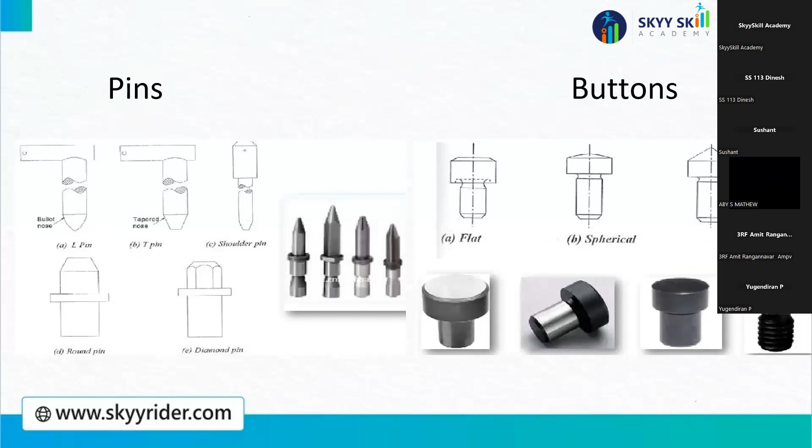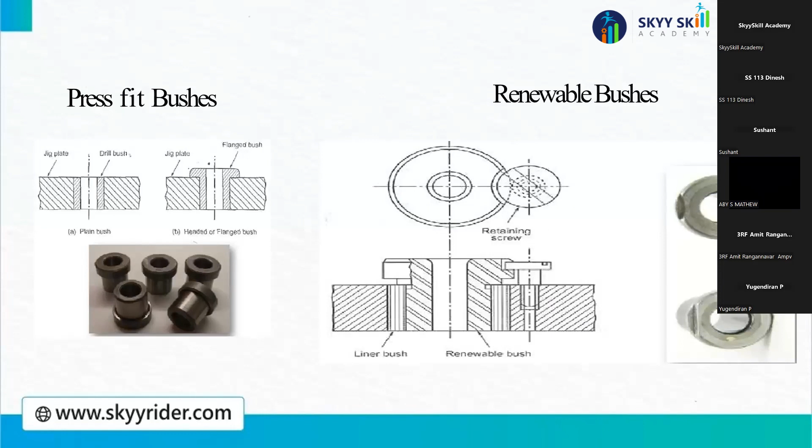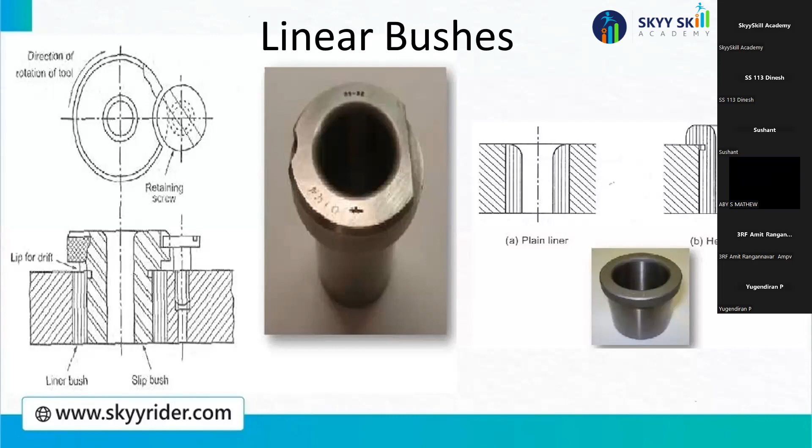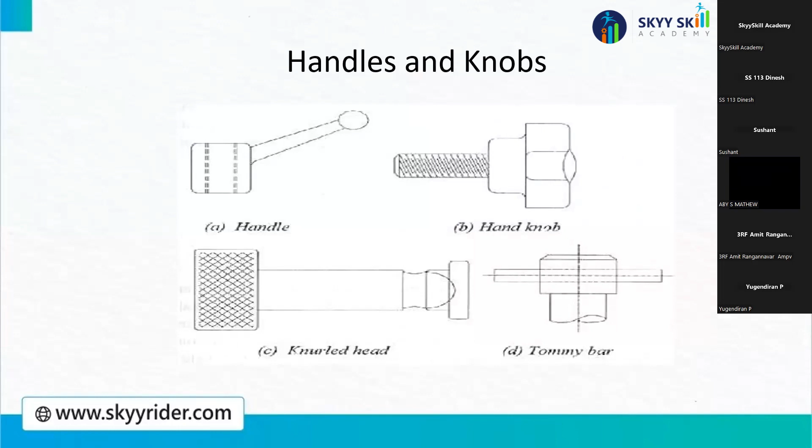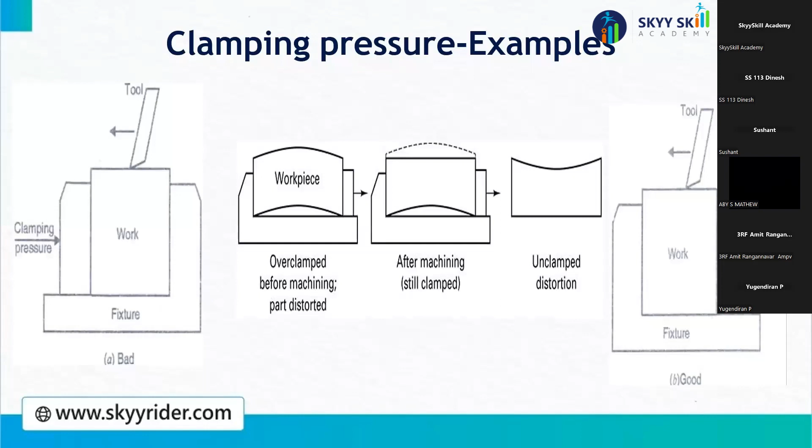Let's say there is overclamping of this component. After overclamping, this job has bent like this. During machining this has to be removed, but after unclamping it will get back to its original shape. So we have to clearly define how much clamping pressure is required. These are some examples of which are good or bad. You can see the direction should be always the same.

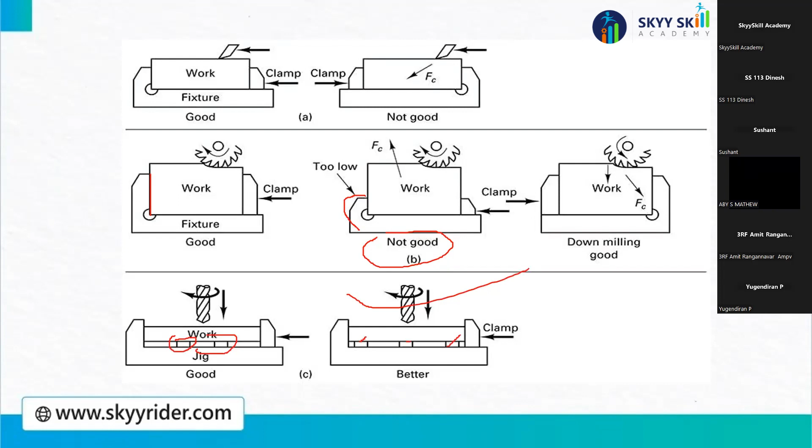So these are some clamping pressures, where you can put the clamping or where you want to put rest buttons underneath the workpiece. You can see if you put two rest buttons. These are actually design aspects only; we are considering these things in design. So this is your workpiece, and this is not advisable.

Just a minute, I need to plug in the charger. Just a minute, give me a moment.

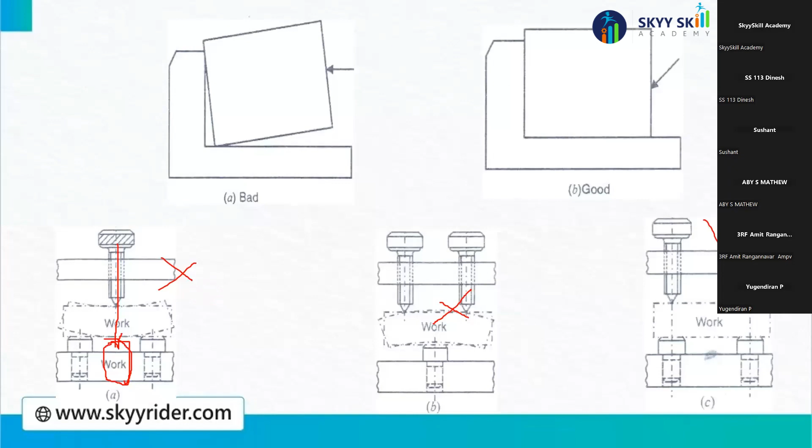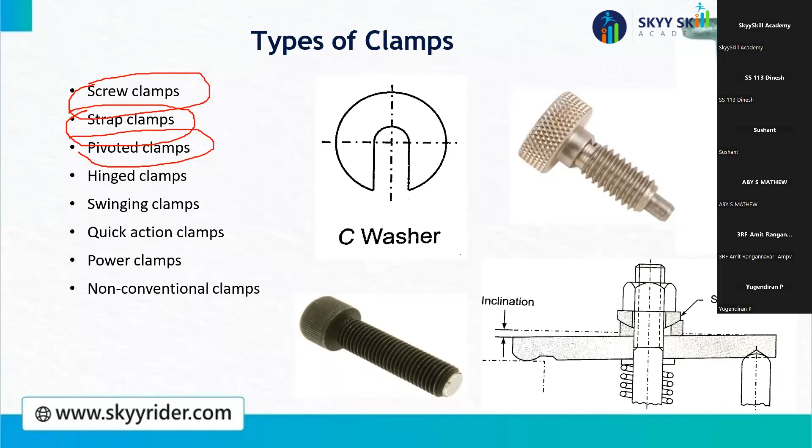So I request, if there is a chance of more webinars, a 7-day or 14-day workshop, that will be better to understand all. We can design in different software, like SolidWorks or CATIA.

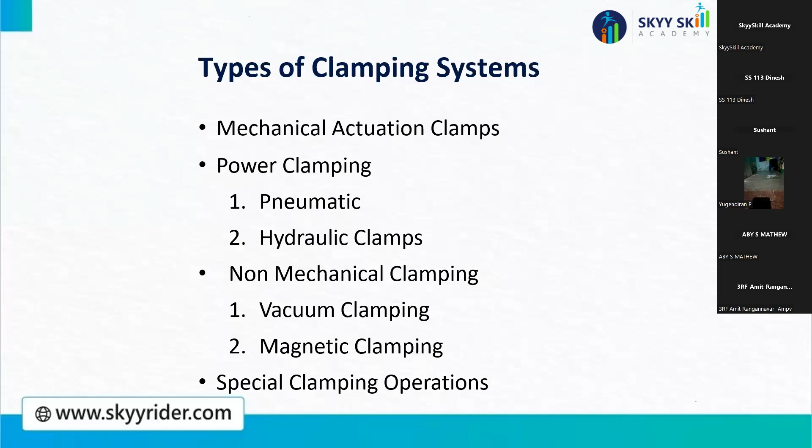These are some quick action clamps. Different clamping systems are available in the market, like mechanical actuation clamps. These are manual clampings. There are power clampings as well, like pneumatic and hydraulic. Some non-mechanical clampings are possible, like vacuum, magnetic, or some special clamping arrangements.

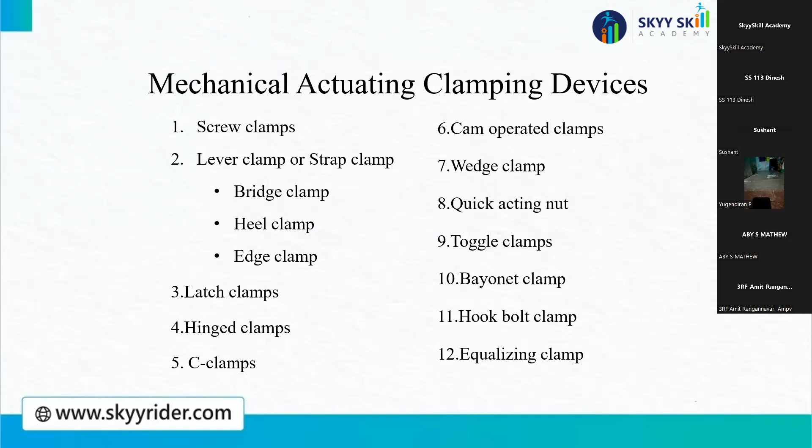For mechanical or manual clampings, these are some basic examples, like screw clamps, lever or strap clamps. The strap clamp is also divided into different clamps, like bridge, heel, or edge. So these are various clamps we can use.

We're just summarizing all those points: how jigs and fixtures are diversified according to their application, according to the shape and size of the component, for getting higher accuracy and productivity. Quality and higher productivity are aimed at through the use of jigs and fixtures in the production process. And jigs and fixtures add to the cost of tooling, so their production should be justified economically.